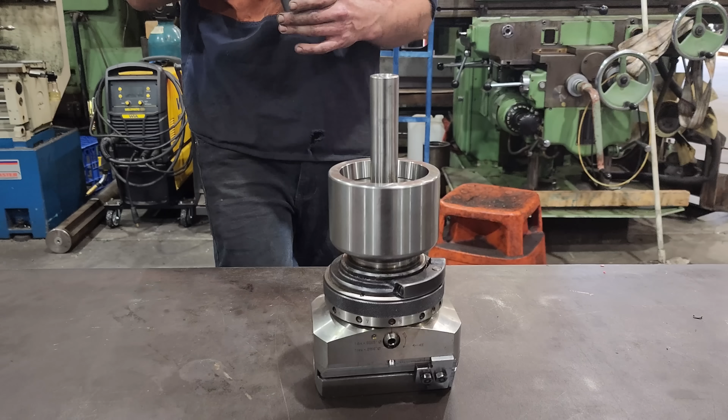So we recently did a video where we made an adapter from a BT50 to suit our hydroptic number 6 tooling. In that video, we did show that we had quite a big variety of tooling that we were able to get our hands on. Because so many of you were interested in seeing it, today we're going to give you a closer look at what we got.

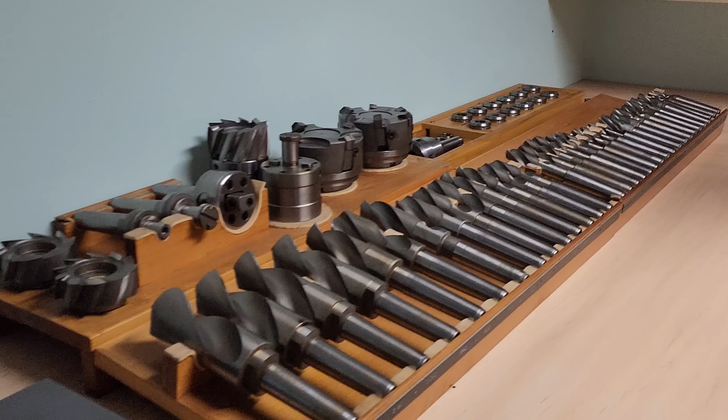So all of this tooling has had very little use, and some of it has actually had no use at all. Some of the tools still have their wax coating on them. They were also stored in a temperature controlled environment their entire life. So we are very lucky to have this tooling that is in near new condition and that you cannot buy today. We're going to get started with what we've got displayed on the bench.

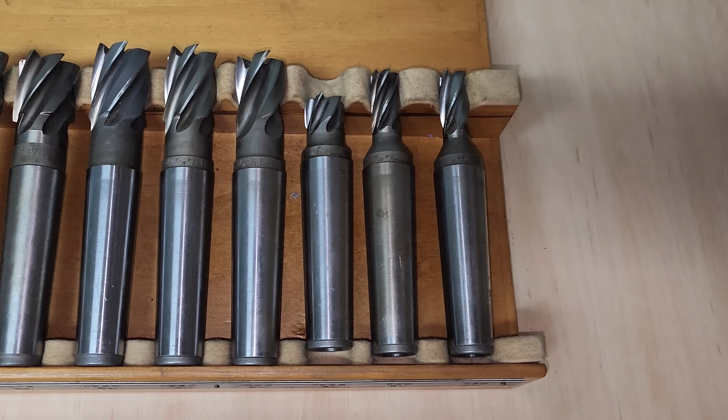So what we have is a complete set of end mills with the Morse taper arbor on one end, and then we also have a full set of drills. Our end mills range from 3/4 of an inch up to 1.5 inches, and we have doubles of every size. One is for aluminium and one is for steel.

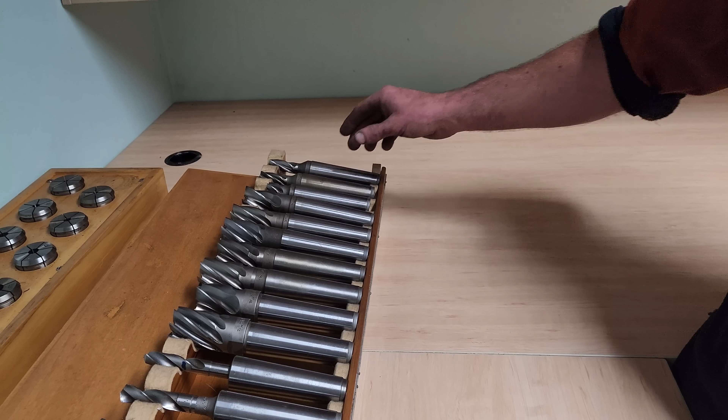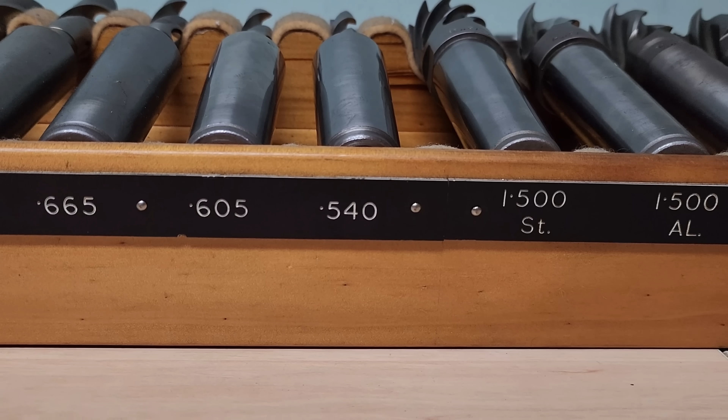We also have a very large variety of twist drills. There are 26 sizes here. They go from 540 thou up to 2,315 thou. In metric, the smallest diameter drill is 13.75 millimeters and the largest drill is 58.85 millimeters. I believe these would have been used for roughing out a hole, and then you would use the boring heads to machine them to spec, because none of these sizes are standard. They are all quite odd.

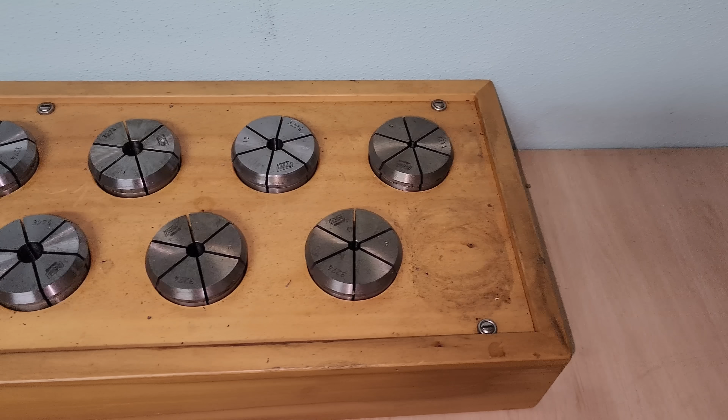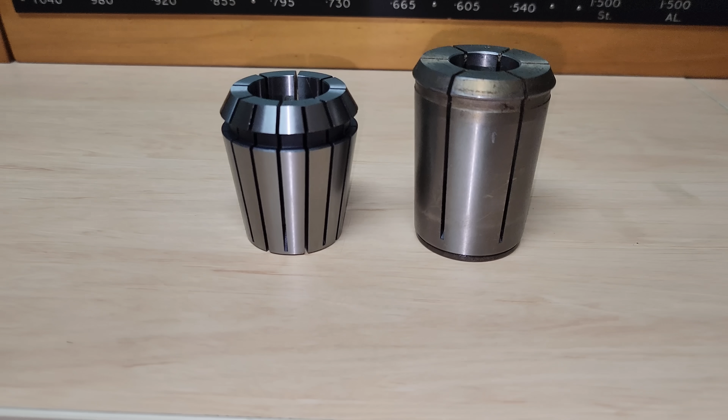So what we have behind the drills and the end mills is a collet system. It is not a genuine SIP tool, but they were manufactured for SIP. These are quite unique because of the way the collet system actually works. They are similar to an ER50 collet, but the taper on those is slightly different, and in the bottom of the collets it does have a thread and a center to use the old school style of end mills. They are extremely precise for the high precision machines. This system has both metric and imperial collets. It goes from 6 mil or 1/4 of an inch up to 25 mil or 1 inch.

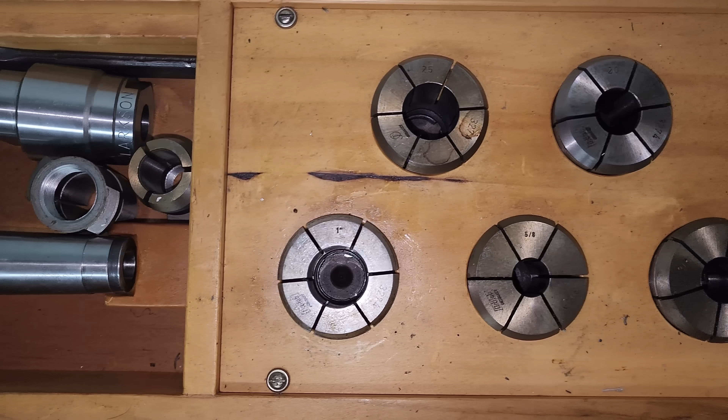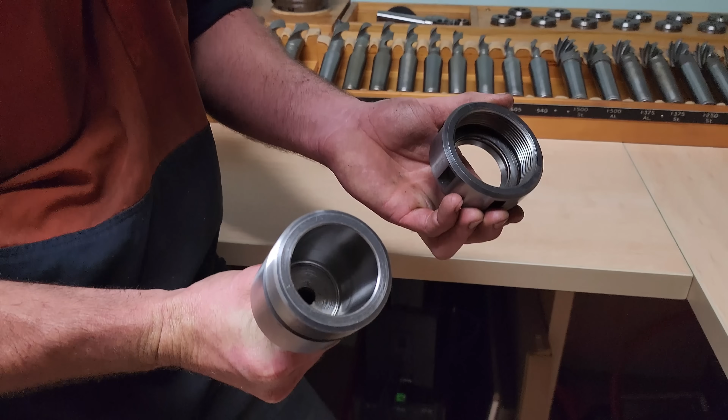Ooh. This one looks like it's being used.

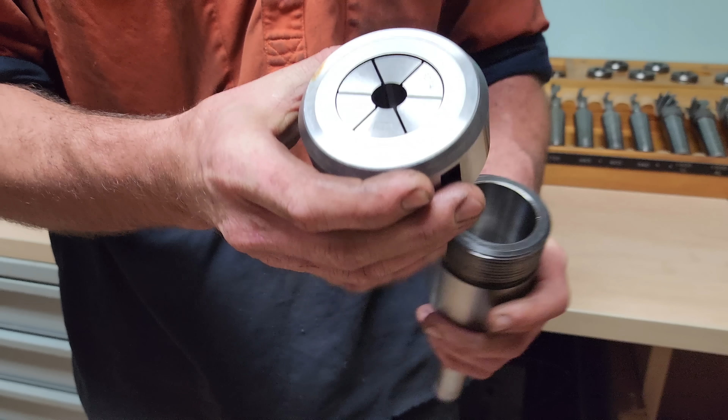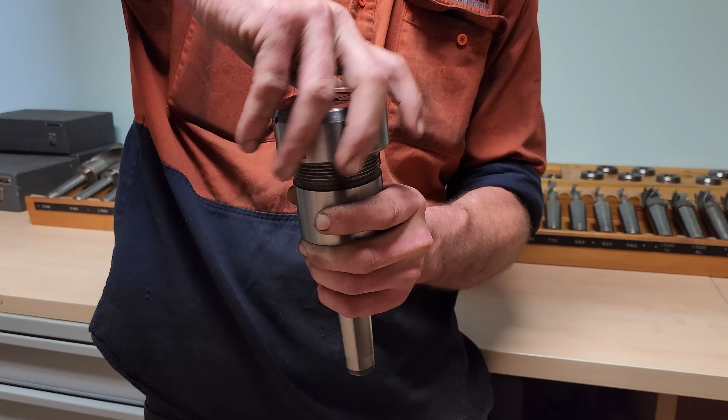So it's a baby auto lock system. Made in England.

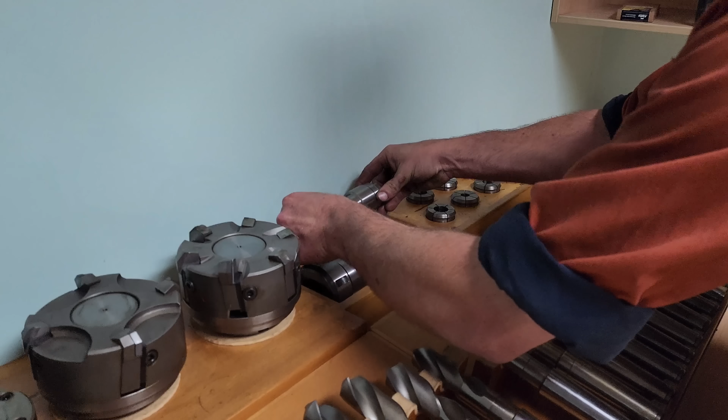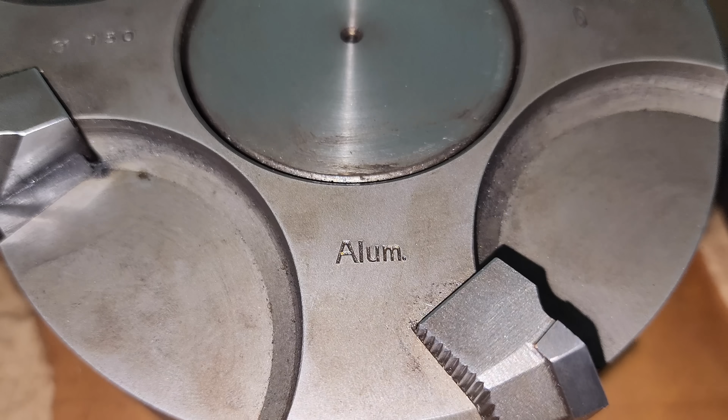Right, so I also got these two face cutters. They are 150 mil in diameter. One of the cutters has 6 tools in it and the other cutter has 4. They are also set up the same way as the end mills, where one is for steel and one is for aluminium. We also got 3 90-degree face mills with matching arbors. All 3 of them are 100 mil in diameter. One of them is designed to cut aluminium and the other 2 are for steel.

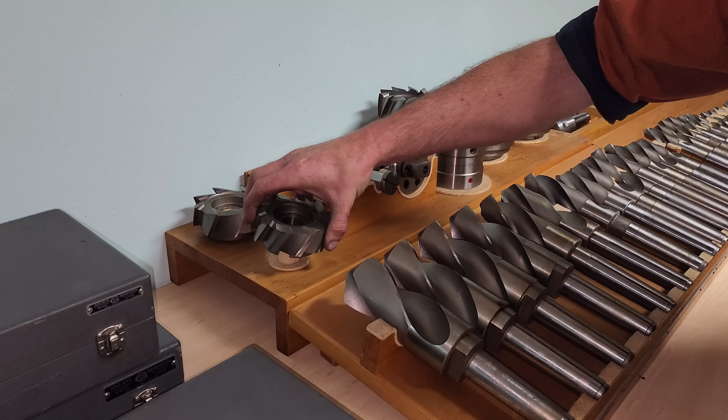So we also got 3 cases of hydroptic instruments. The first box unfortunately is incomplete. So I have seen pictures of this, and what I can work it out to be is used as a setup device for finding the center of a hole.

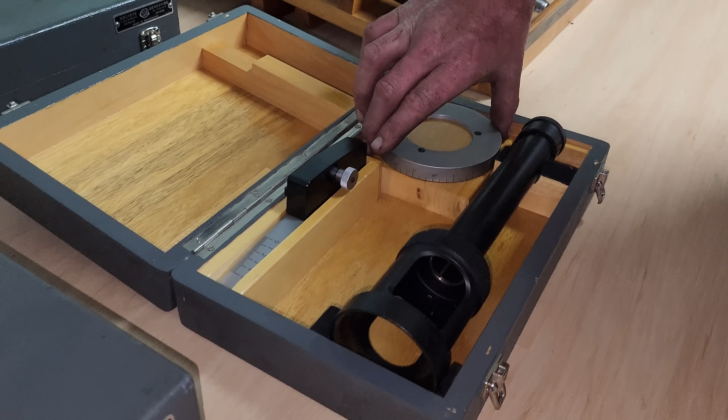Whoa. Oh, that's used for indexing.

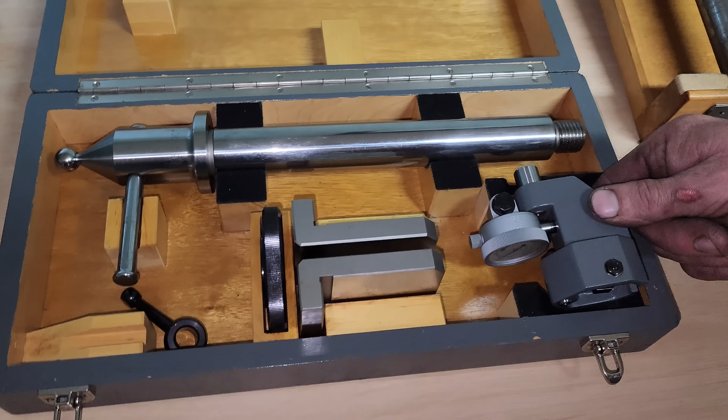So all those instruments are used for the setting up of a job on the machine. Along with all the tooling, I did get some pamphlets and some manuals about the machine and its accessories.

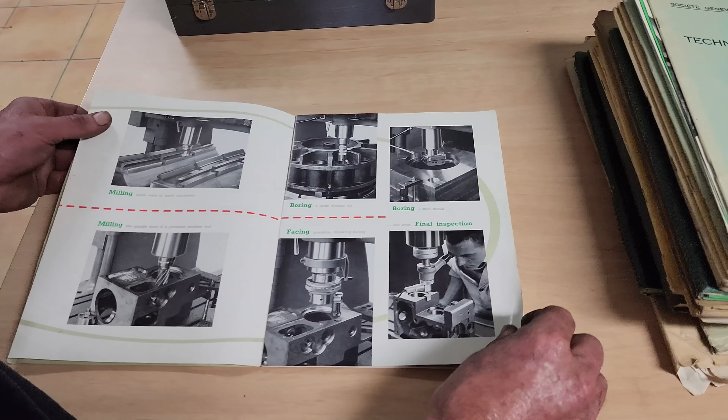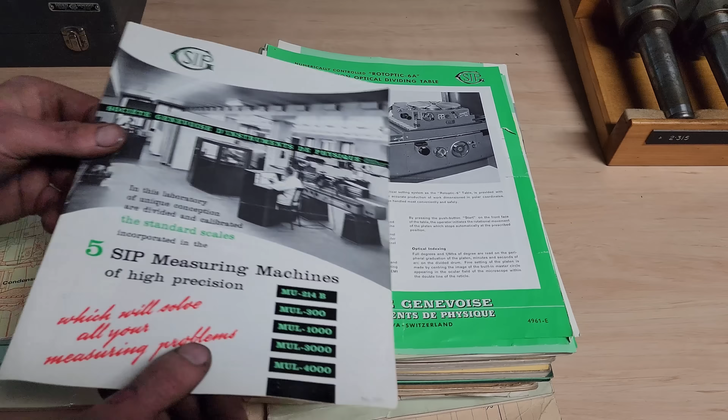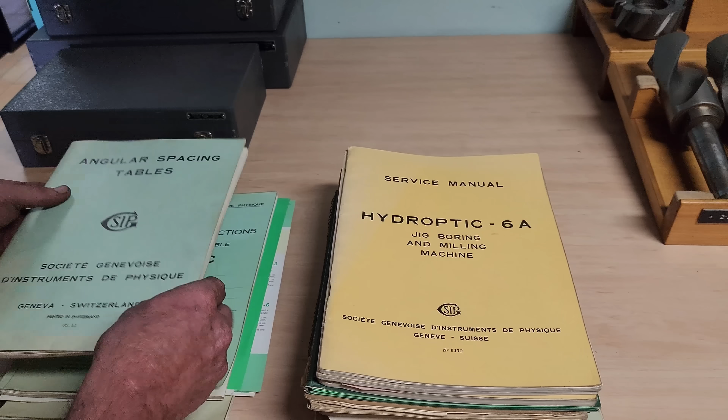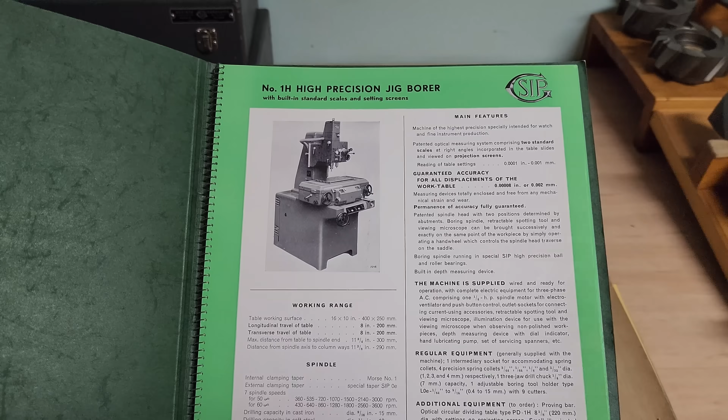So there is quite a few other books of technical instructions. There are also measuring books with your charts for different degrees and different angles. There is a few service books in there for looking after the rotary table and the machine itself. But one of the nicer bits of paperwork that we found is a sales catalogue, and it's in pristine condition. It is nearly perfect for something that is over 70 years old, and it does show you what SIP machines were available at that time, as well as the accessories and what tooling was available.

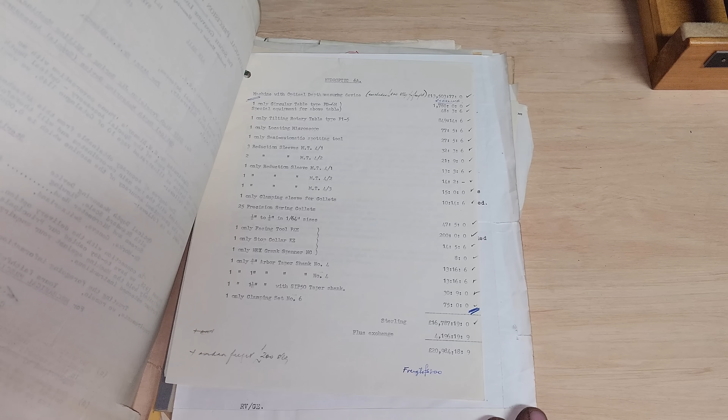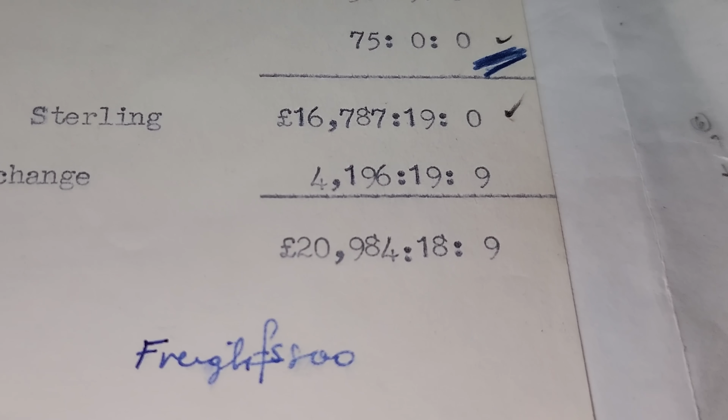Something else we found in amongst the paperwork was the original receipt for a hydroptic 6A and all of the tooling and accessories that we now have. The machine at that time was £13,500 sterling, and the final bill was £20,984. Based on inflation, that amount today is £604,000. The paperwork shows the machine was purchased in 1958.

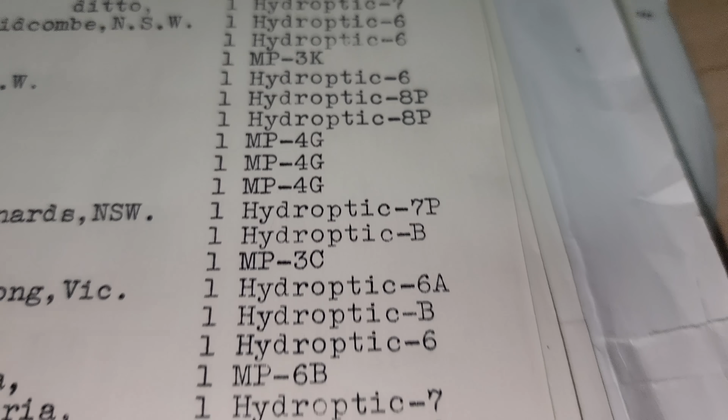Something else I found in the paperwork, which is really cool, is a list of the jig borer machines that were commissioned and installed here in Australia up to 1958. A nice piece of paper like this just shows the provenance of where things came from and where we are today. There's a list of over 40 machines installed, ranging from the smallest MP1 up to the 8P. A lot of those machines went into places like Holden, Ford, defence contracts, tooling factories, and the railway works. There were a lot of machines here at one stage.

A lot of these factories aren't even around anymore. Most of those machines probably ended up being sold at auction or even being scrapped, which is very unfortunate.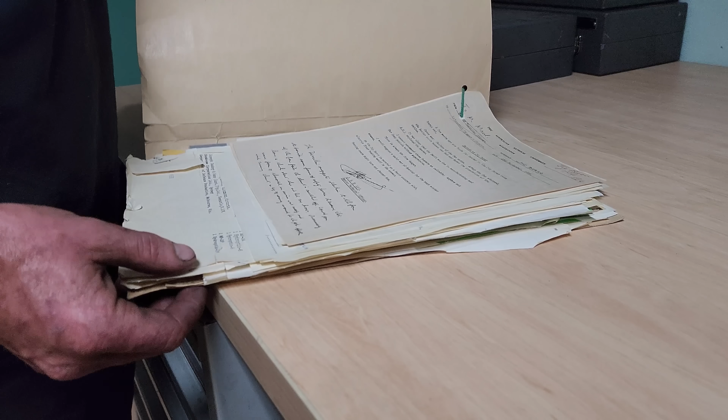So that's just what we've got here on the bench. There is an original Genevoise SIP tooling cabinet behind me, which is full of tools and equipment as well.

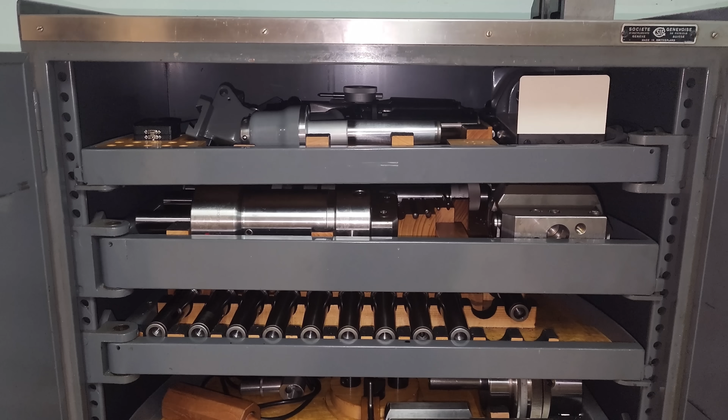This tool cabinet was the piece of the deal that I really wanted. You cannot get anything like this today. These were built so well and so well thought out that no one has come close to being able to store tools like SIP were. So we're going to show you what's on each of the shelves.

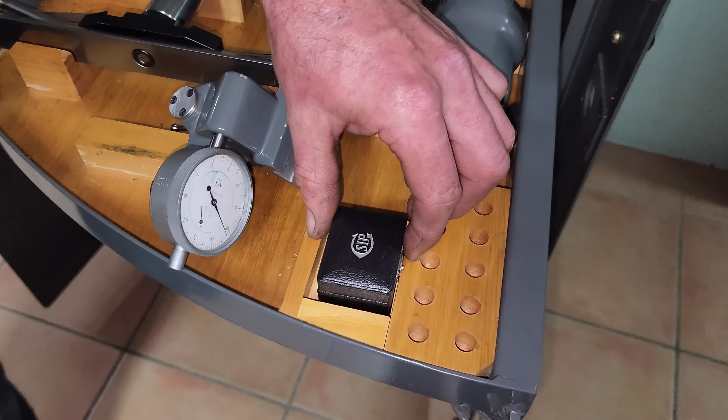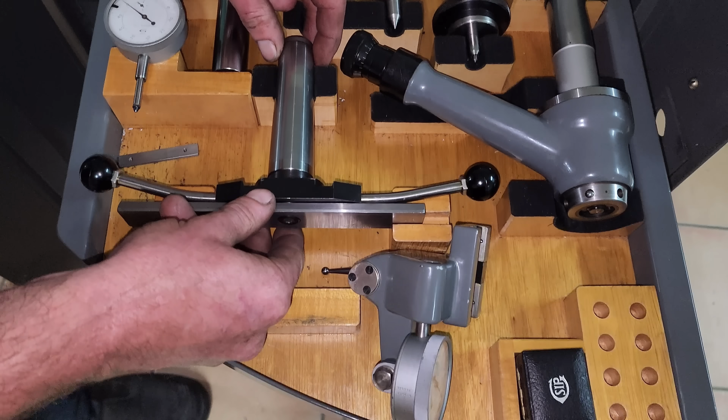This top shelf has all of the measuring equipment in it. You have an old school style coaxial dial indicator.

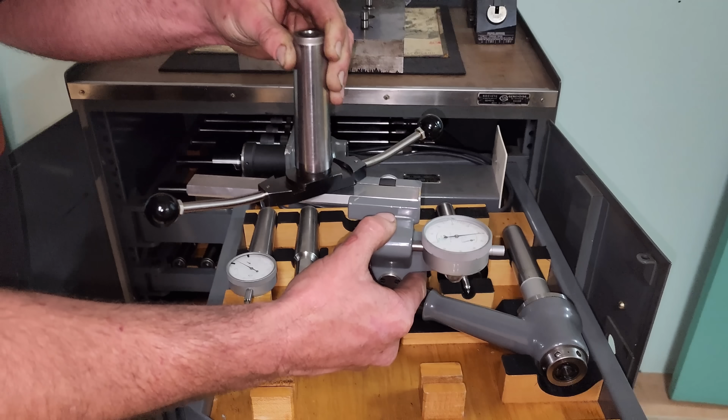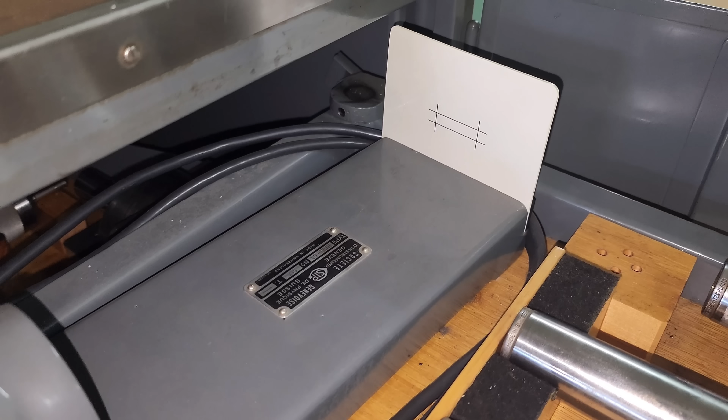You have a few center finders, and you do have an optic for looking from the spindle down to a known position where you're about to drill a hole. It also has the main optic that is used for leveling the machine or leveling a job.

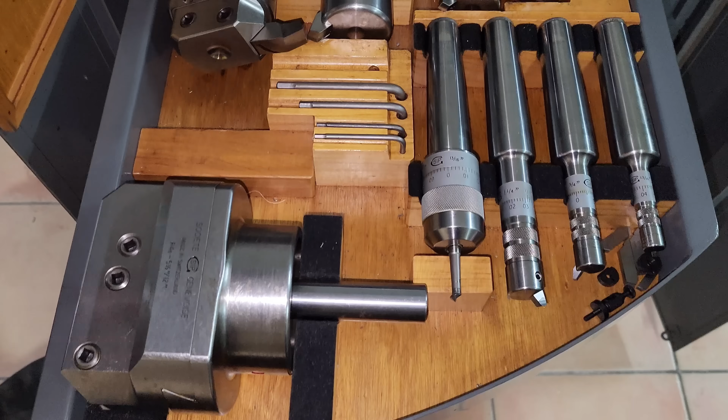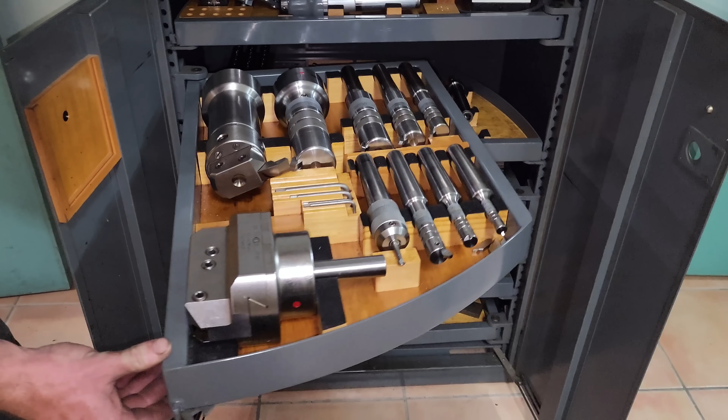On this shelf we have all the adjustable boring heads, ranging from very small up to 12 inches once it's had its extensions put on it. These are all super high precision — there is pretty much nothing on the market today that can match these for how precise they are.

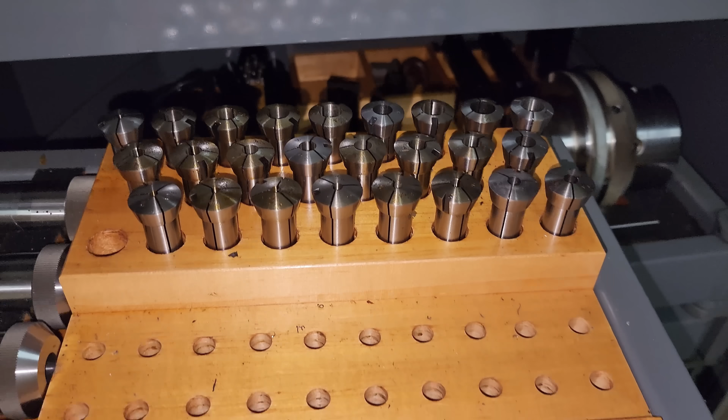On this shelf we have a very high precision collet set. These are very unique to the SIP machines and the way they are assembled. There's a very big variety of collets in there and different holders, so you can have multiple tools set up in order to use them.

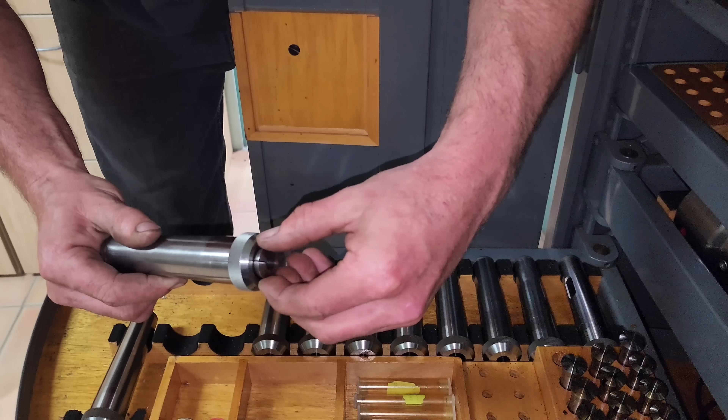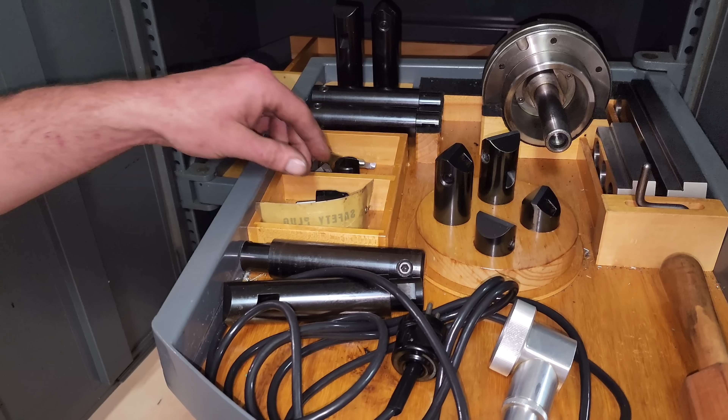In this shelf we have the facing and boring head, many different length holders, and 2 crossbars that go in the facing head to reach different diameters. There's also a safety plug here that goes into a SIP jig borer to stop the spindle from rotating when you're doing service work on it, so you don't accidentally turn it on and hurt yourself.

And this looks like a lint roller — it isn't. It's actually an original SIP Morse taper cleaner.

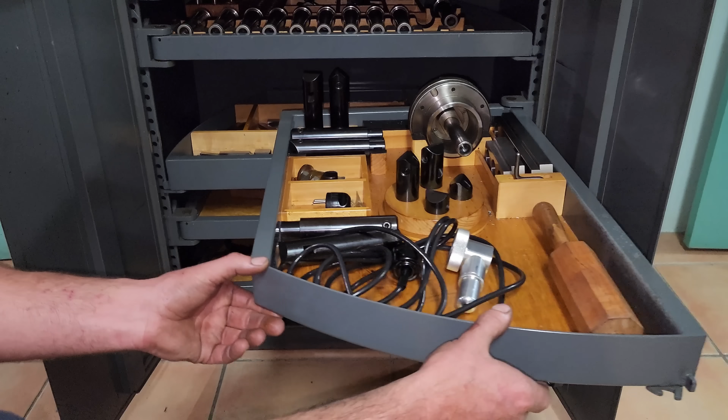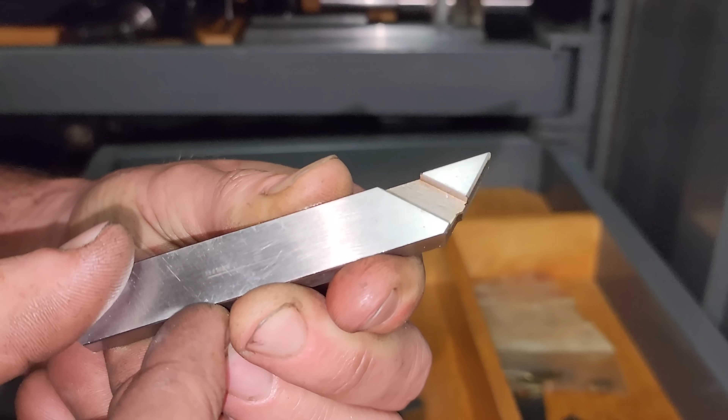On this shelf we have all of the original tool bits that go in the boring and facing heads. They are quite unique to SIP because they have a slot machined in the end of them, which is used to advance them and hold them in the right position before you tighten them up and lock them in place.

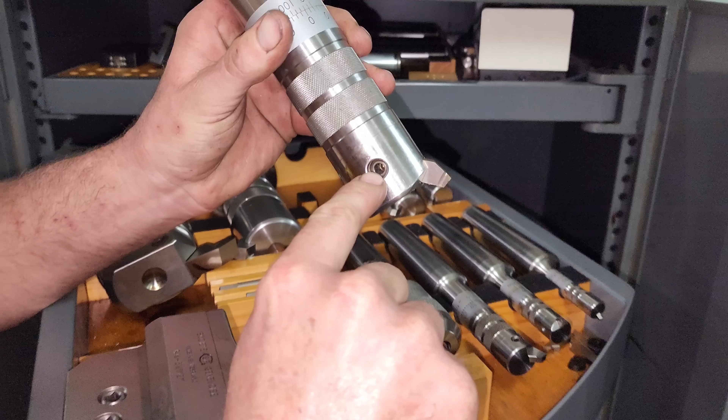Here you go — so inside the boring head, you undo that screw there and you can take the tool out. You actually turn it and there's a little peg that comes down, picks up that slot, and pushes it out. You re-lock it using your grub screw, but that's how they work.

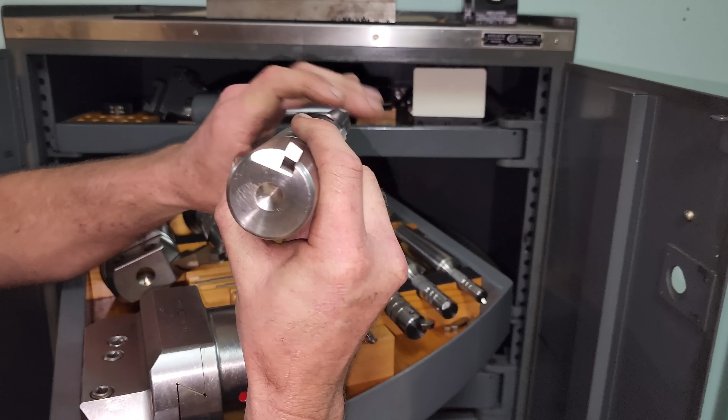Amazingly, you won't be able to see it — oh, there it is there. There's actually a screw there; it's been installed and then machined flat. I found it the hard way. So that screw, you undo it, you've got to get it out, then you can take that bottom cap off and pull them apart.

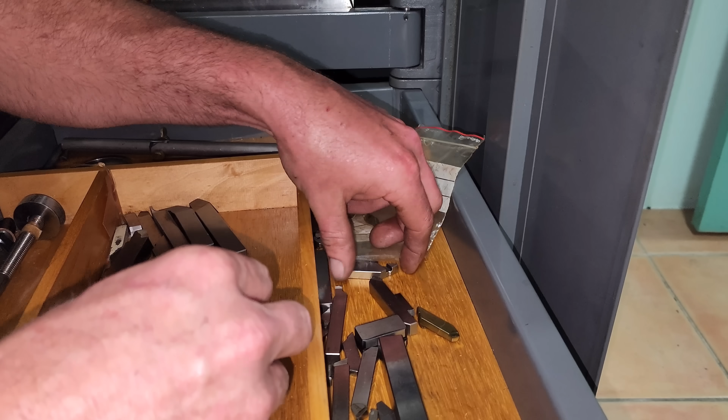There are ones. So that'd be for cutting an internal groove. Right.

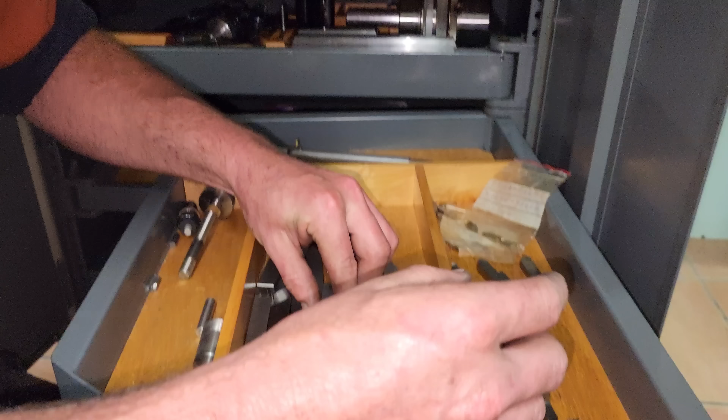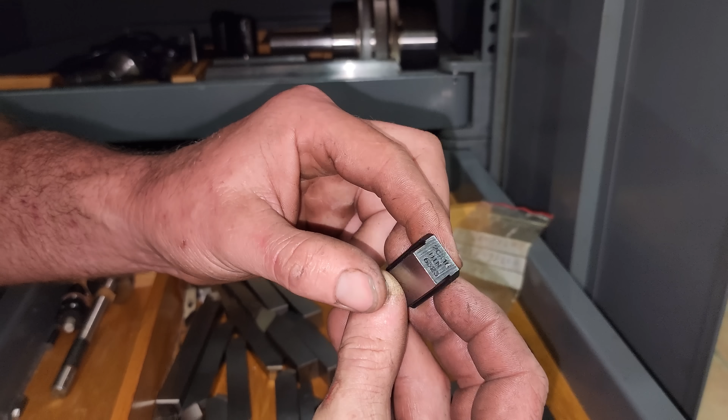What is that? That shouldn't be in there. 20 by 16, it's a gauge. The other two shelves I think just hold bugger all. Yep.

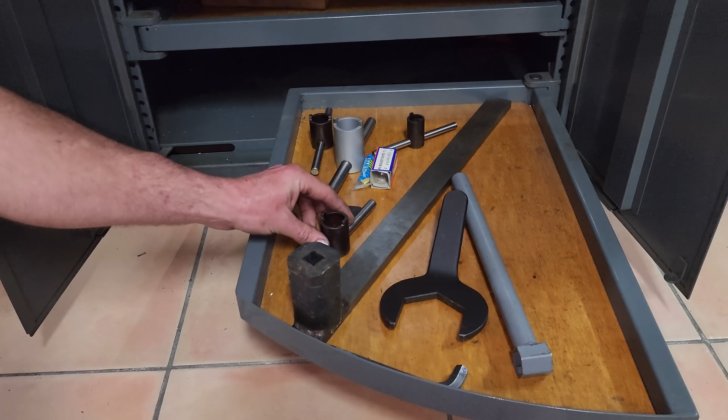So on the bottom shelf we've actually found quite a variety of specialised tooling for the SIP machines. So that was our SIP tooling cabinet and all of its accessories, but there are a couple of unique tools that I'd still like to show you.

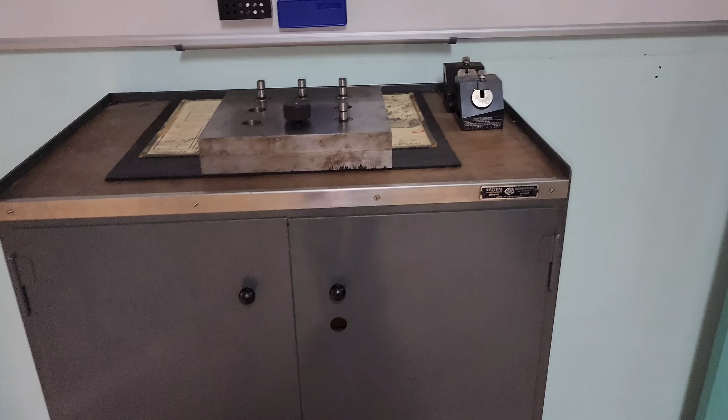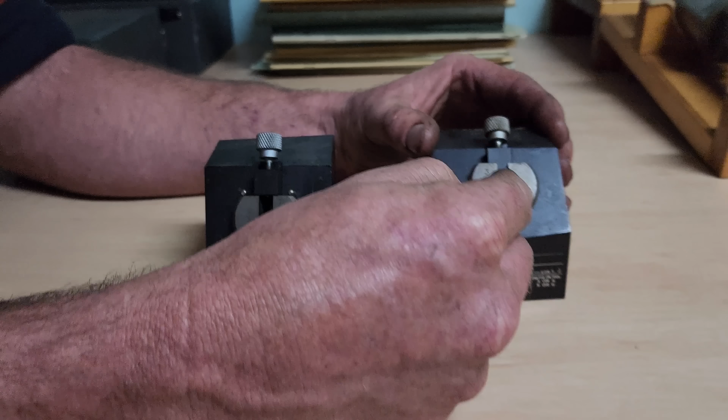These are grinding fixtures, so you can resharpen the tool bits for your boring and facing heads. You have one for your smaller bits and one for your larger ones. So that's a standard tool bit for a boring head. The way these grinding fixtures work, you put your little tool bit in there, you lock it into position, and then you can use it on a surface grinder or a tool grinder in order to regrind the tool bit to the correct shape.

The blocks are actually made to the set geometry of the original tooling.

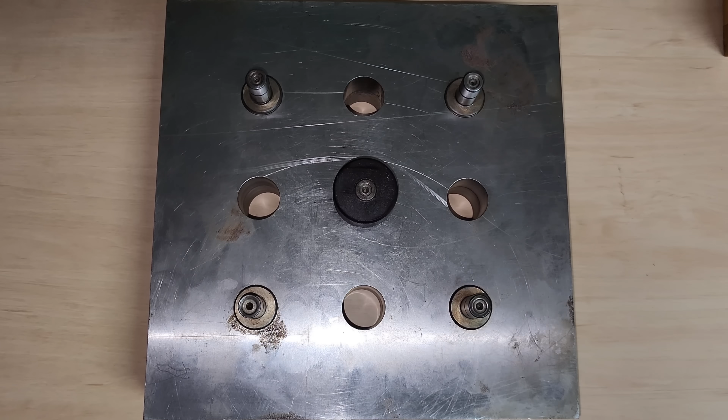So this last item I'd like to show you, it is probably the biggest wow factor to the collection of tools that we have got. This is the original test block that was machined on the 6A that all of this tooling came with. What the test block is, it is two plates that are machined on opposite ends of the bed, and one is in a completely different orientation to the other one. The SIP installers, along with their machinists, would then do a sample piece to prove how accurate the machine actually was after it had been installed.

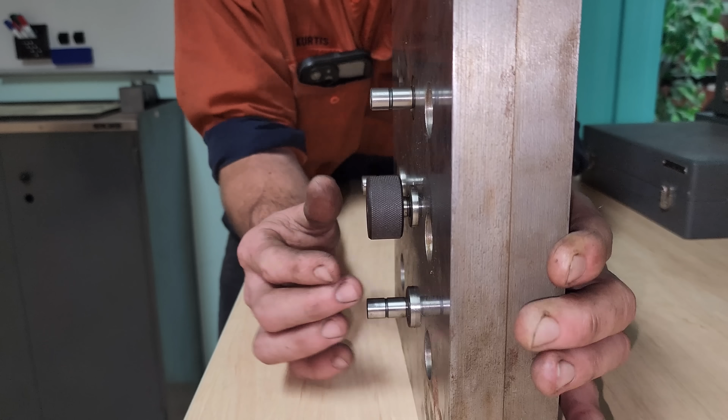Right, so that is our collection of this amazing SIP tooling, but there is one more thing I'd like you to see.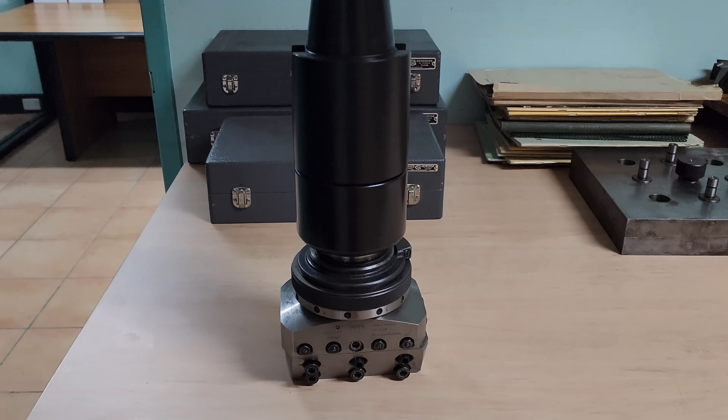Our shop-made adapter is back from its tufftride treatment, and we have a job we'd like to test it on. So I'm going to go set it up in the machine and put it to the test.

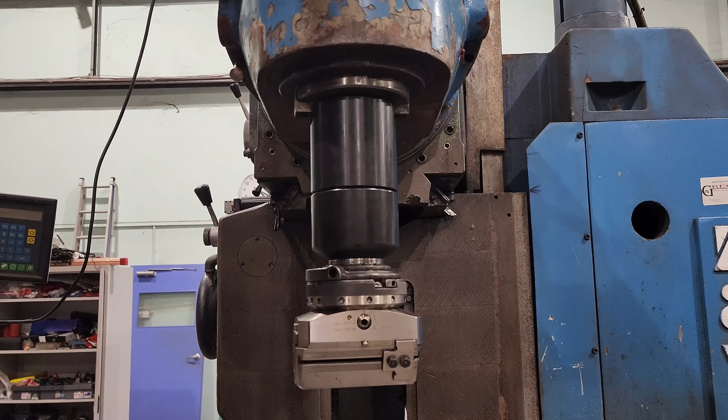So its first job is going to be boring out an eye off an EX1200 bucket cylinder rod.

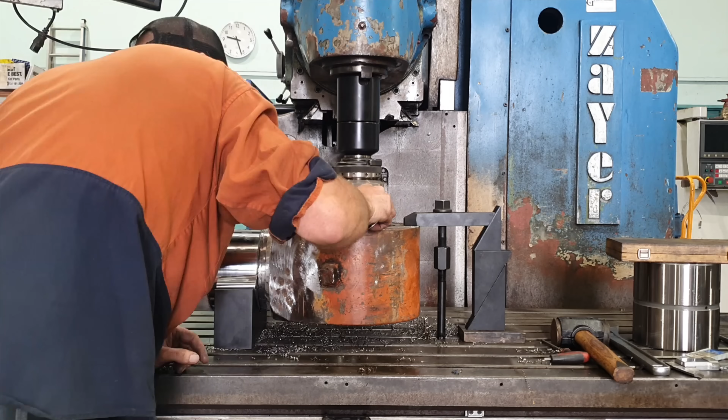So this performed exceptionally well considering how long the adapter actually is. I took some pretty heavy cuts and then some finer cuts, and the surface finish in the eye turned out very, very good. So I'm extremely happy with how the boring head is performing.

I hope you all enjoyed seeing the variety of SIP tooling we've got. That's it for this video. Thanks for watching.

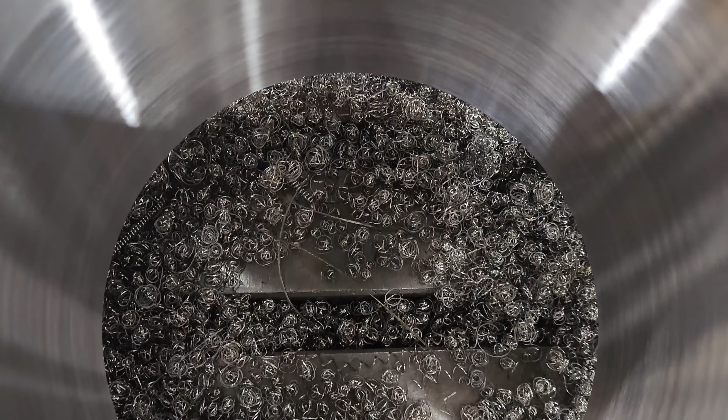Swarf balls. So shiny.